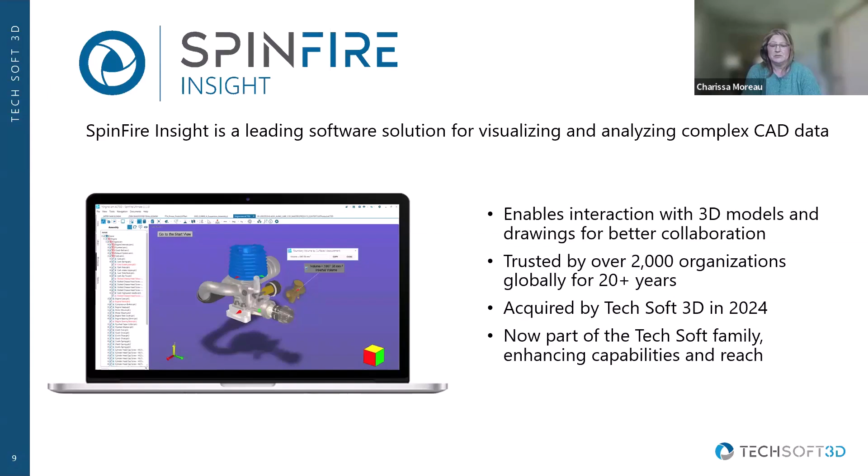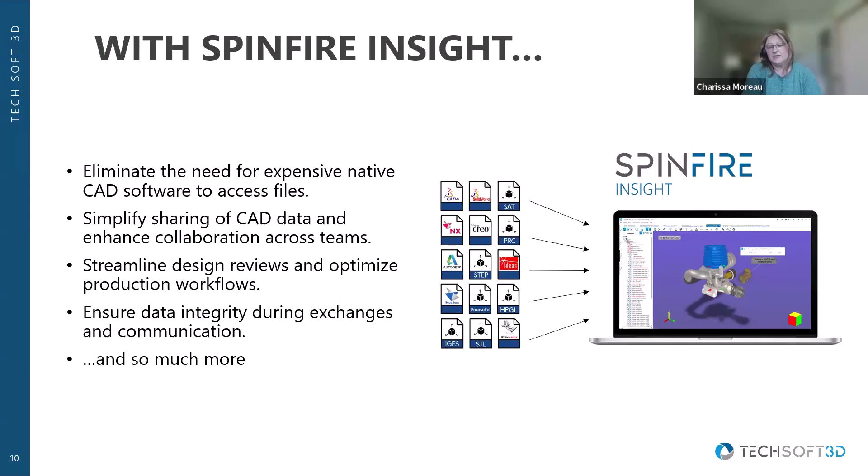With SpinFire Insight, file format compatibility is no longer a barrier. We provide seamless access to all major CAD file formats, simplify collaboration across teams, and streamline workflows, all while driving cost efficiency. This is the most obvious challenge that SpinFire solves. SpinFire Insight can handle multiple CAD formats, giving you the flexibility to investigate and communicate on a range of different CAD formats.

SpinFire Insight has a robust set of CAD visualization, measurement, markup, and analysis features, giving users greater insight to product data. With SpinFire Insight, users can effectively expose engineering metadata and view it in context with a 3D model. That being said, I'd like to now reintroduce Allen Hardy, and he's going to elaborate more on this during the demo of SpinFire Insight. So Allen, go ahead and take it away.

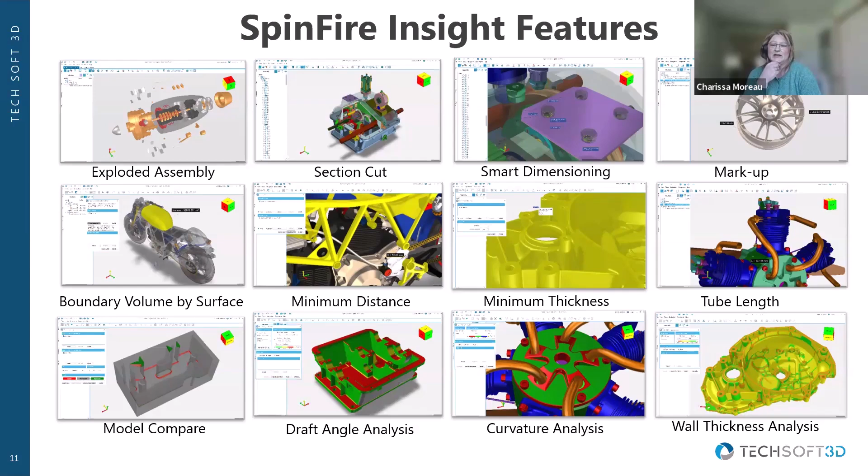Thank you, Charissa. Again, my name is Allen Hardy. I'm a technical consultant here with TechSoft 3D. Today, I'm going to show you some of the major key highlights of SpinFire Insight of the latest release. One of the major improvements that we've made with SpinFire is a massive improvement of 84% reduction in loading time for large assembly CAD files.

Additional features that I'm going to highlight today is the ability to do weight calculations for multi-materials, being able to assign materials to individual components to have a more accurate full assembly weight calculation.

Additionally, we have introduced a new export format, HTML format, which I'll show you how easily that can be done. And some other changes we've made, just regrouping our importer settings and 3D viewer settings, just for a more accurate way of finding your settings.

We have some additional tools that we've recently introduced with SpinFire for advanced selection of group highlighting based on colors and based on attributes, which I'll get into shortly. That just helps engineers be able to quickly find parts for part identification. And then we always have new updates periodically throughout the year for importer updates to stay in line with the new releases of the major CAD formats.

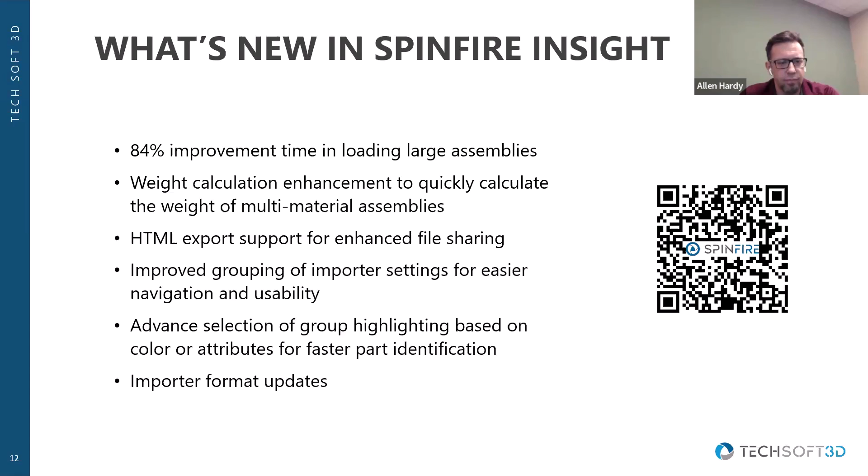And now I'll go ahead and jump into our demo.

One of the major changes we've made with the latest release of SpinFire is a new version scheme. Historically, we've always kept it at 11.5, 11.10, previous release 11.12.0. But now we've changed it so that at the top here you see SpinFire 2025.1. This aligns our versioning scheme with the rest of our TechSoft products, and we've made significant performance improvements as far as loading time goes.

So if I jump over to my homepage, here we can see a list of our recent documents. I'll go ahead and hide this for now. With my recent documents, it actually displays the file location, the timestamp of when it was last modified, size, and the time duration it took to open up that file within SpinFire.

Here we can also right click and explore that file in the file explorer, or the folder on your desktop. I can also open or reopen the files from here as well.

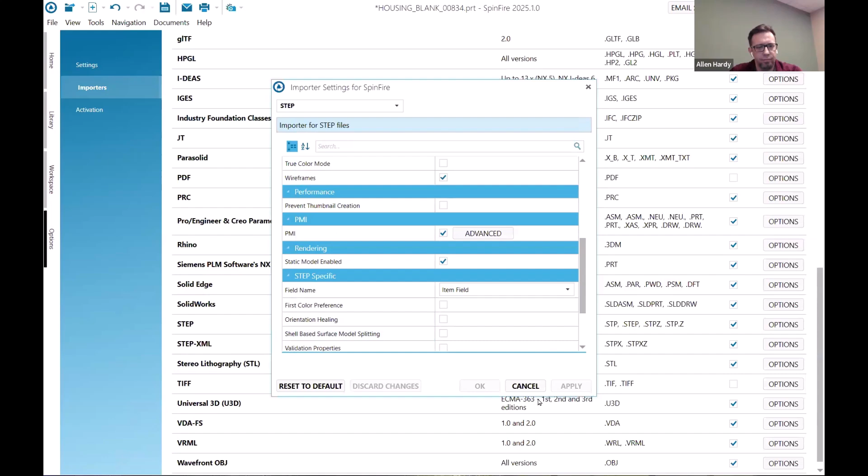Some of the other things that would help with enhancing performance: with your graphics driver, you always want to keep that updated to the latest version. There's also an option if you go to the control panels of the graphics drivers, there's a way to update that setting for SpinFire and SpinFire Viewer to select a high performance mode. That will help to optimize or enhance your usability of using SpinFire.

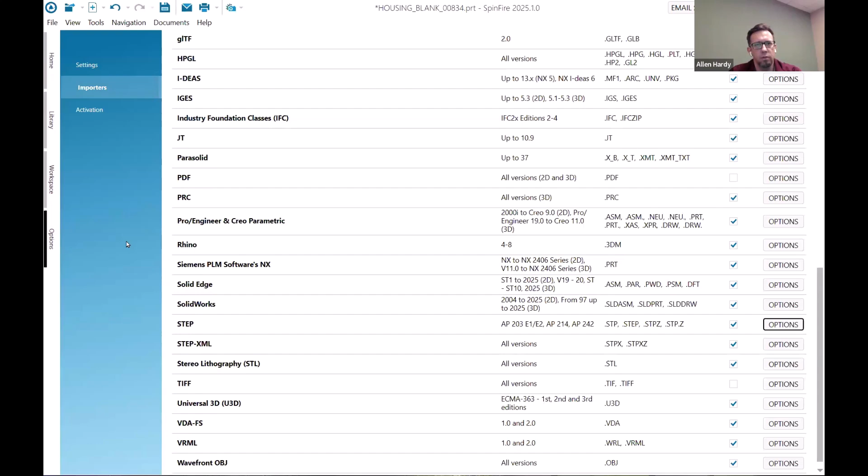Now let's jump into one of these examples here and show you some of the key changes, key highlights that we've made with the latest release. And the first thing I want to mention is the material assignment.

For example, we have a full assembly here. Initially, if you were to do a weight calculation of an assembly, you right click on a part and go to calculate and say weight. By default, this is showing zinc and only showing the single part. If I right click on the parent item and say calculate, it would give me the weight, and it would only be one part. This is a new feature we've introduced in the latest version where it labels all of the materials built into this assembly.

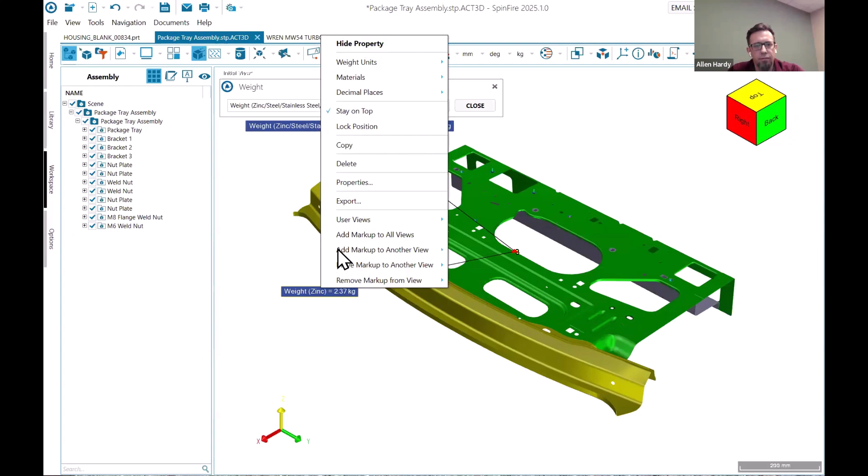In this calculation where I calculated zinc, by default right now, because of my drop-down menu, I have it set to zinc as my default. I can change this to any other material and do another weight calculation, and it will take into effect what I had selected in that default. I can also always go back and change that manually with the existing measurements or calculations we have here.

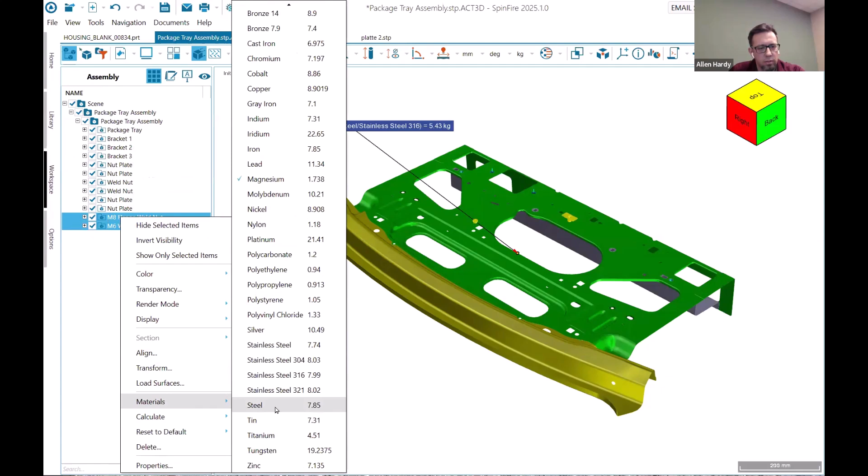So now to get to the point of being able to calculate multi-materials, let's just say we have nuts here assigned steel - I'm sorry, wrong one. Multi-select with holding my control key down and go to material, and let's make that stainless steel. Weld nut, right click, steel. Change these to steel. Maybe change these as well to steel.

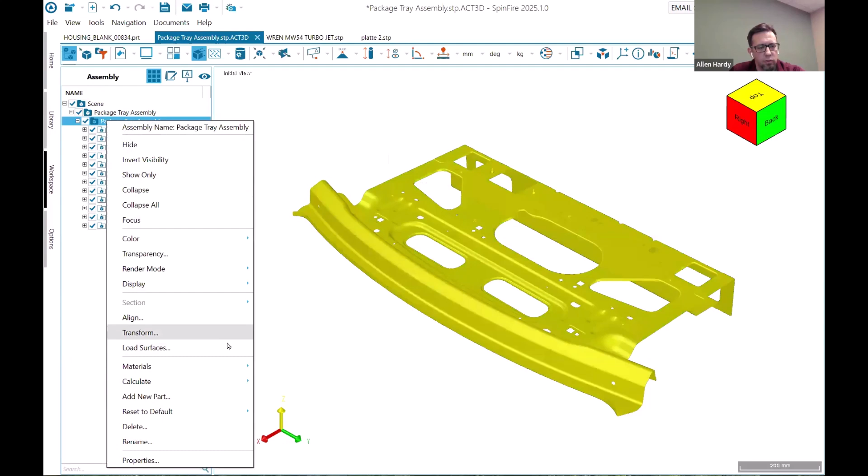All right, now once I've changed my materials for all of those different individual components, let's do a calculate weight once again. And now we see weight has steel, stainless steel, and magnesium assigned to the different materials.

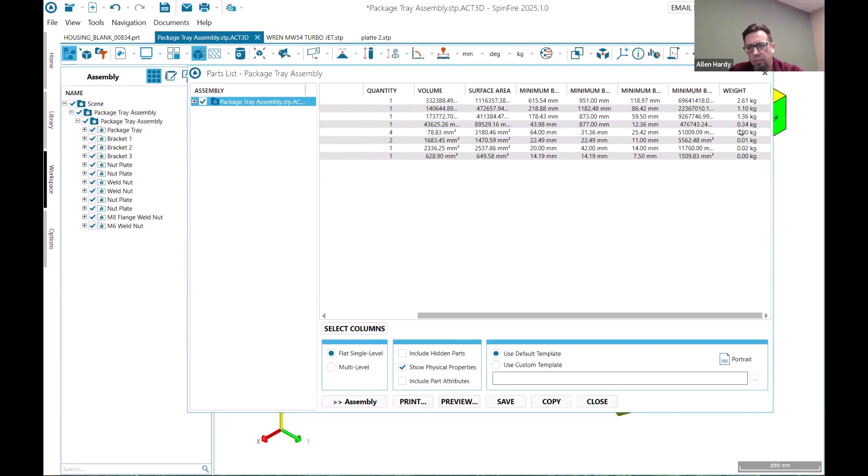Another nice feature we have with being able to assign these materials to the individual components: if I navigate to File, Export, and go to Parts List, I'll select Show Physical Properties. As that loads, it'll add all of the additional columns to be able to export a bill of materials, and it has that weight information in it. The values under my weight calculation for the different individual components are updated based on the selected or assigned materials.

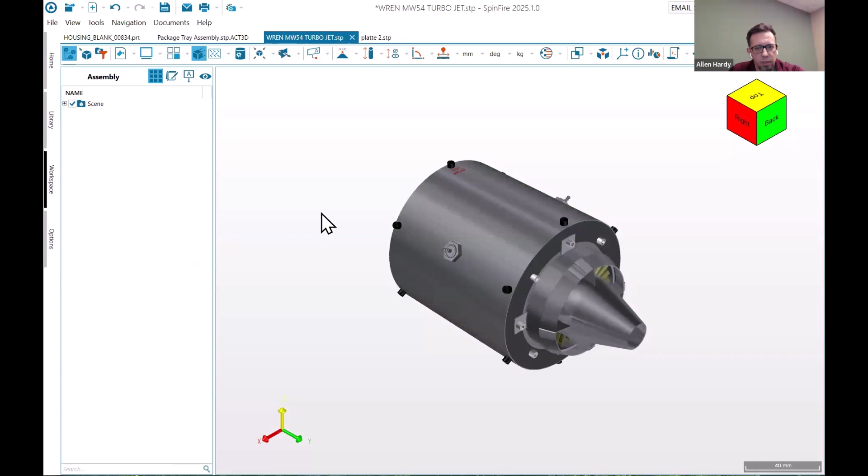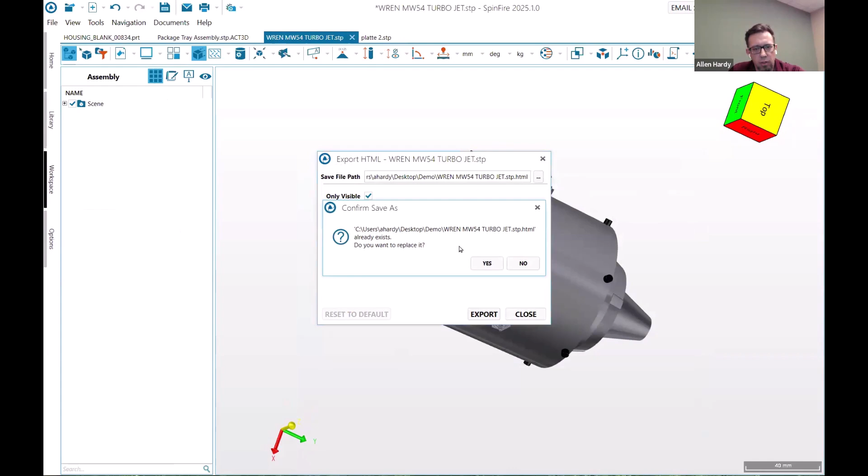Additionally, we have introduced the ability to export as HTML format. So let's go to another example here with this turbo engine. If I go to File, Export, HTML, and we have only visible selected, by default that will save an HTML file to the location of the initial CAD file when I opened it. I can always browse and point to a different output folder if I'd like. So I'll go to Export, replace it, sure. Okay, and then as that file generates, I'll go ahead and open up the HTML file.

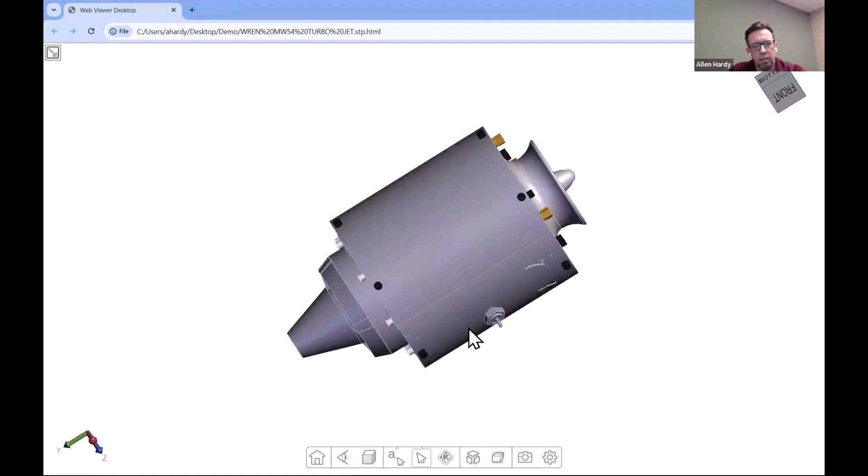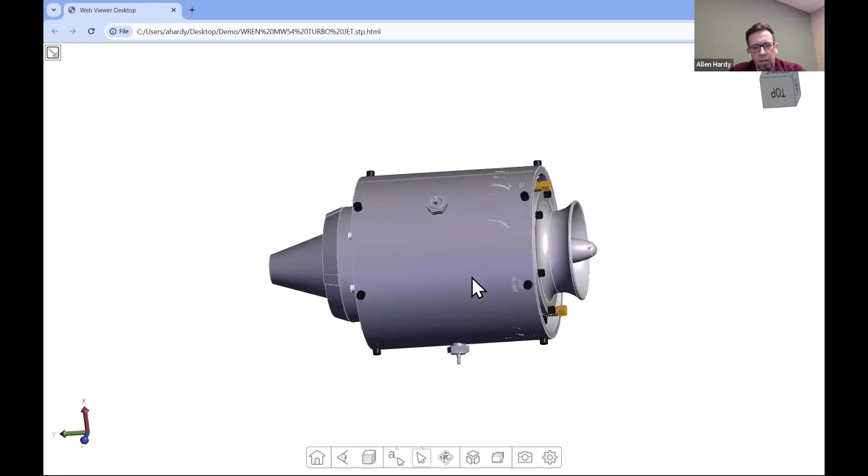This HTML file is automatically loaded into my default web browser. As you can see, without having to install a CAD application or CAD viewer, with the HTML file being able to load in the web browser, I'm able to quickly spin the CAD model around, or use the navigation cube, clicking on the different parts of the cube that will also spin that model around.

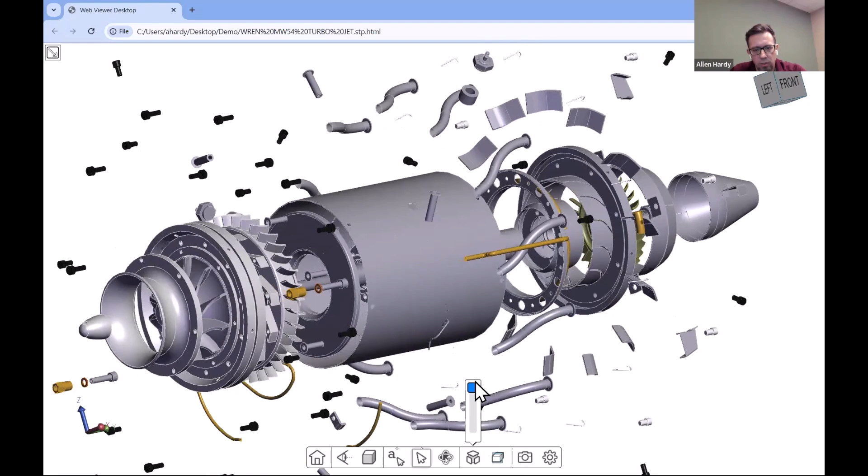A couple of nice things that the web viewer provides is the ability to do an exploded assembly. So if I toggle my exploded icon, you get this little scroller bar here, and scroll up, and you can see those parts explode off of a spherical center point of this entire assembly.

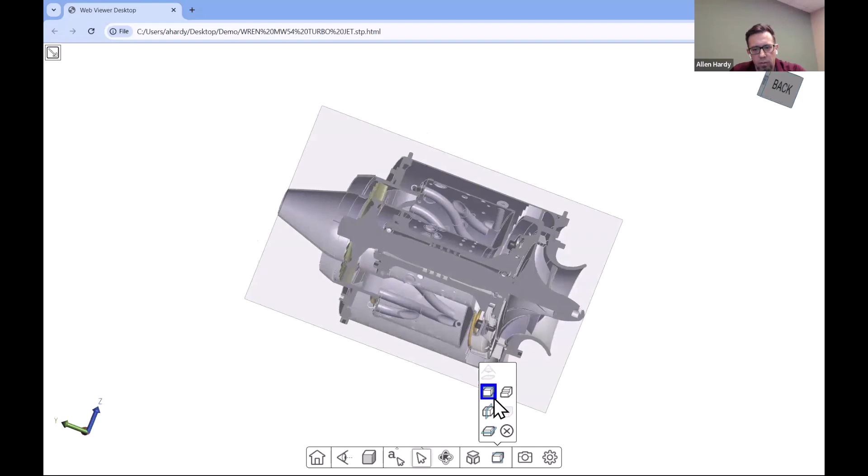Then we have cross-sectioning. There are 3 different planes here that I can toggle on and off. So let's just start with one. With this one section cut open, if I press and hold the plane, my cursor on top of the plane, and move my cursor around, I can see that move around, and we see the section cut this way. Now, if I click on this plane again, it actually flips the plane over, turns it off, turn it on. Second click reverses it or flips it, and third click turns it back off.

As well, if I had 2 planes here, we can do a quarter cut this way. And if I wanted to quickly just reference the rest of the assembly, I could turn that back on, and it actually flips it around.

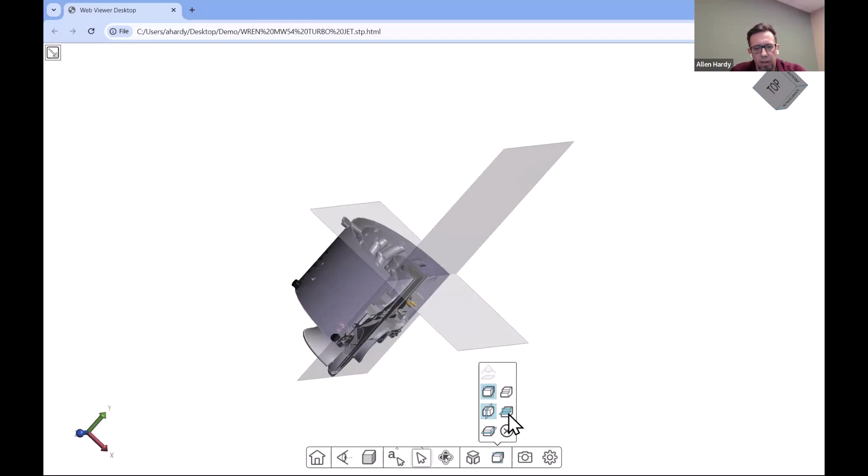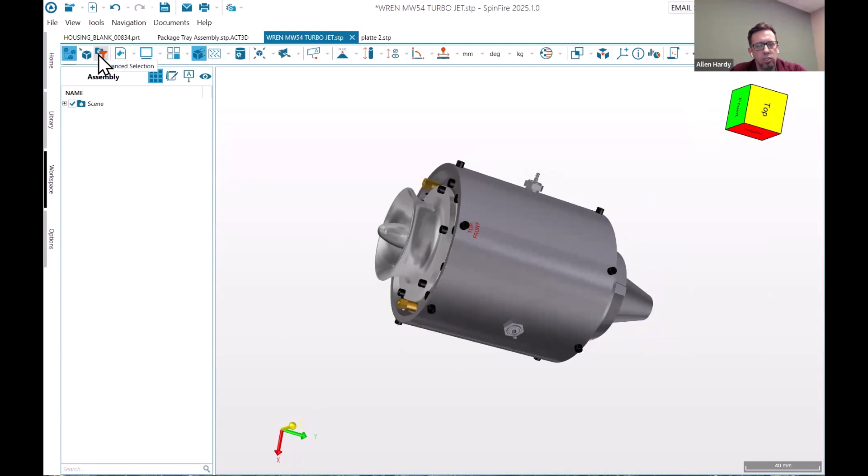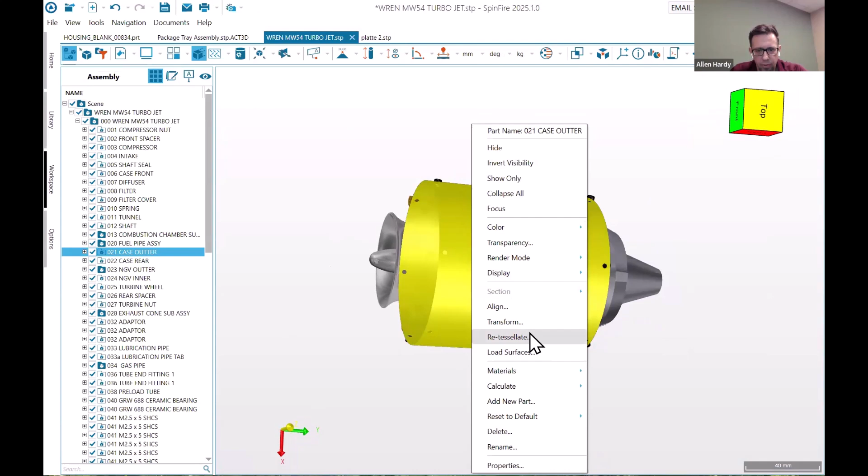Another feature that we've recently introduced with SpinFire Insight is this ability to do an advanced selection, highlighting of parts. Let me just click on this part. Right click, you see a context menu that gives you a handful of features specific to part selection mode, or specific to selecting individual components. That same context menu applies if I were to right click on the component within the model tree.

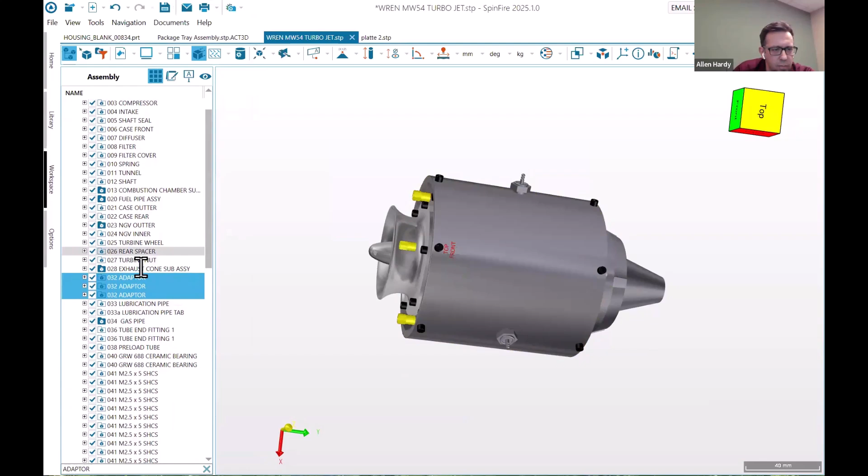Now, if I go down here and type in adapter, this then highlights all of the components that have adapter as part of the part name within that assembly tree. You also see that highlighted in the geometry as well.

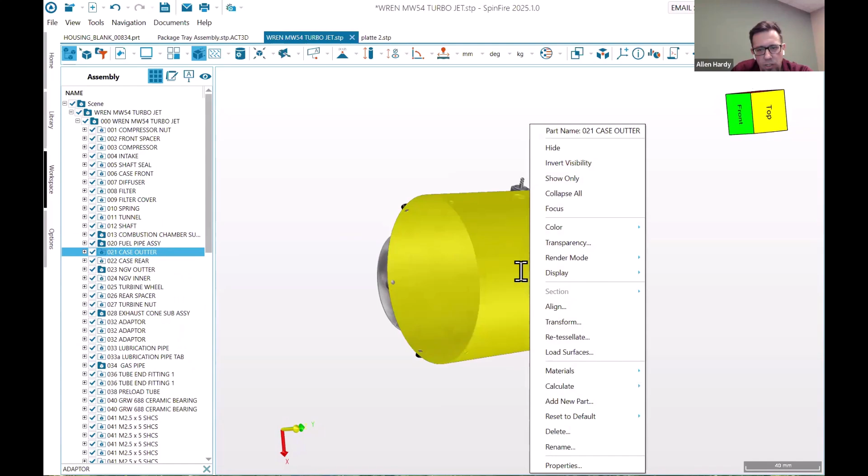Right clicking on a part will select it in the tree and the geometry. So you can do certain things, like maybe I want to change transparency of this housing just to be able to see the inside components, make that more visible.

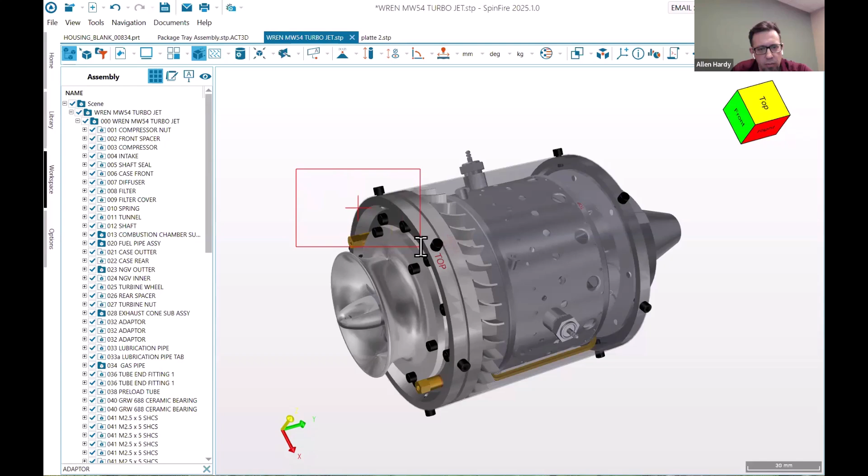Also with multi-selecting, if I were to hold my shift key down and right click, drag and drop, it creates this red box, and that's going to highlight all of the components that touch that box. Additionally, if I use my shift key in the assembly tray, that's also able to multi-select, or my control key, again, that multi-selects as well.

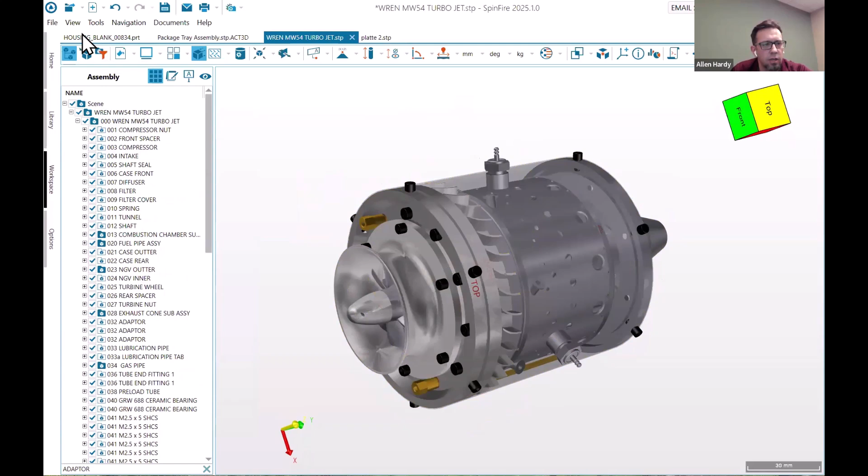What I wanted to get to you is the additional feature called advanced selection. This feature allows me to select parts based on color, so all of the components that have the same color assignment, or you might have a case where you have a single part.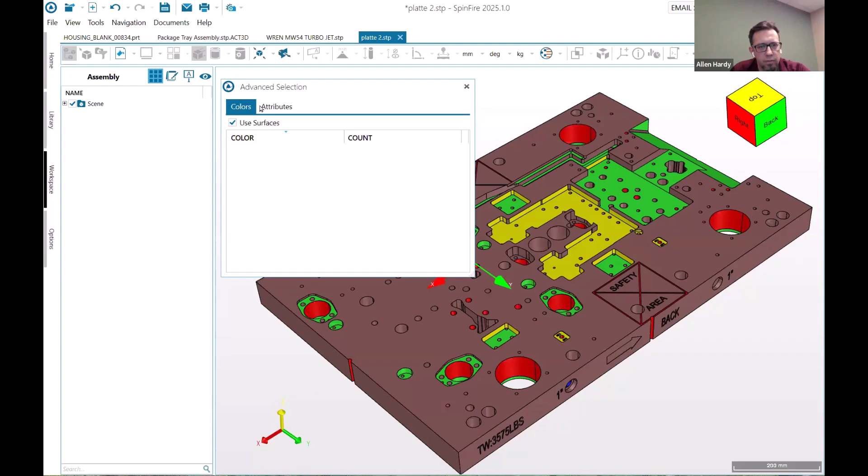Advanced selection. Here's one part and you only see one component there. Let's just change this to use surfaces. It's supposed to have multiple surfaces there to show up.

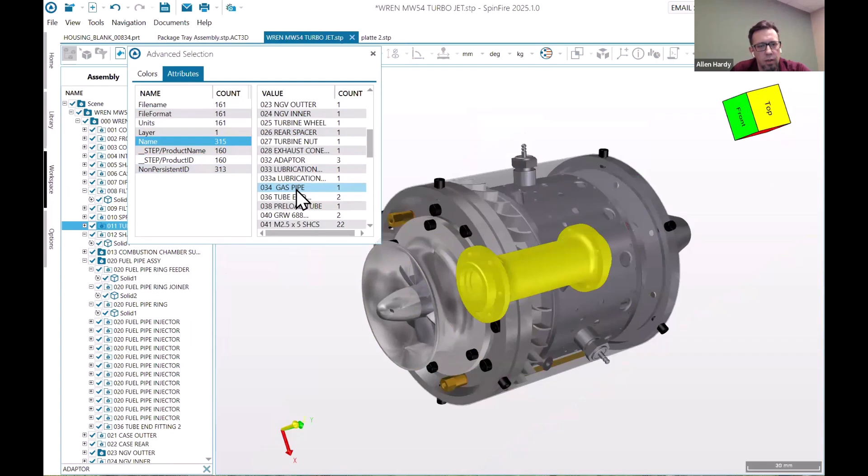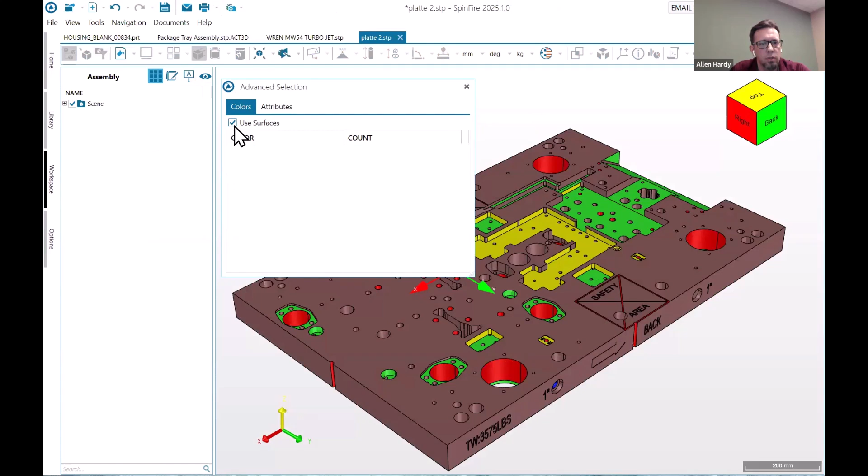Let me just go ahead and switch over to another browser here. Let's see our selection mode. Okay, that's interesting. It should be highlighting the different color components there.

Additionally, with the individual colors, or being able to select parts or surfaces, if I right click, it selects the entire component. We also have the ability to toggle between part selection mode and surface selection mode. Now this, if I were to right click...

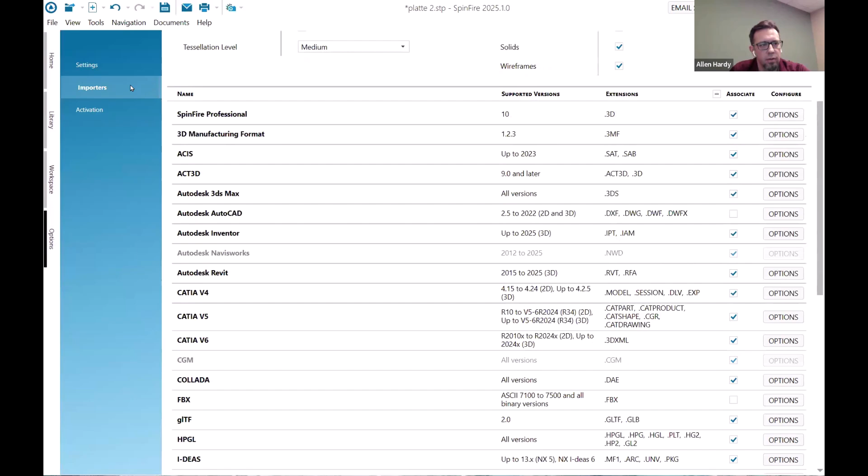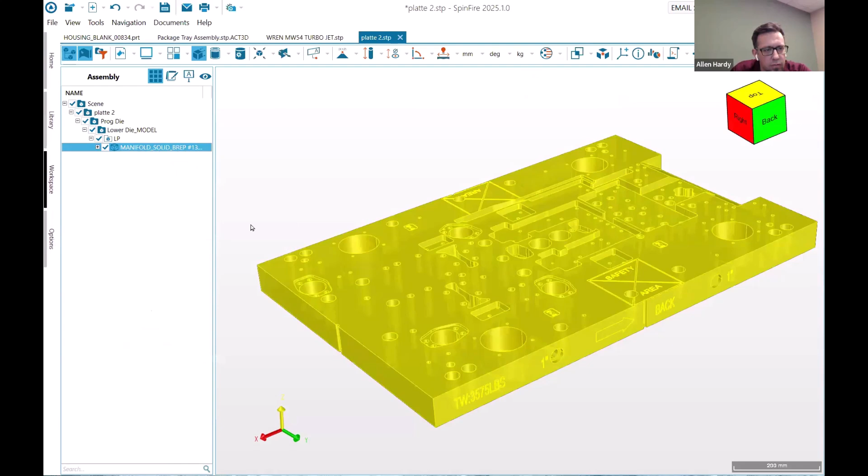I see. So with my performance optimization, I had this load surface under my settings, importers, load surface on demand. So you see how this item in the tree has a circle around that plus. Just to enhance the performance of this model, it wasn't fully loaded. So I will right click on that part and select load surfaces. Now if I right click on a part, it just highlights the individual surface.

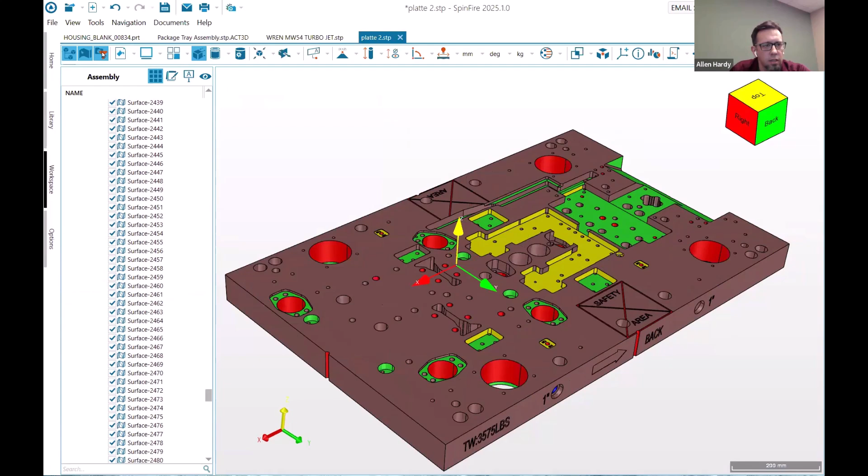Now let's go ahead and check the surface selection mode. Let's toggle between the two. So here we go, that's why I wasn't able to see all the different surfaces, because I had my load surfaces on demand enabled. So it wasn't able to see that information.

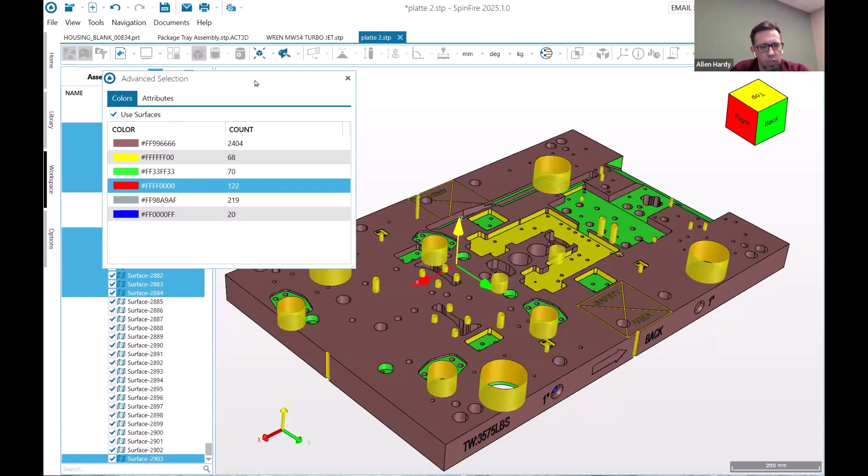But you see now, being able to highlight the specific colors, such as this, all the red components, and maybe you want to change all of those red colors to a different color. So I'll right click on a component in the tree, go to color, navigate to front and back, and just change that color. It takes just a couple seconds to load, updates all the individual pieces.

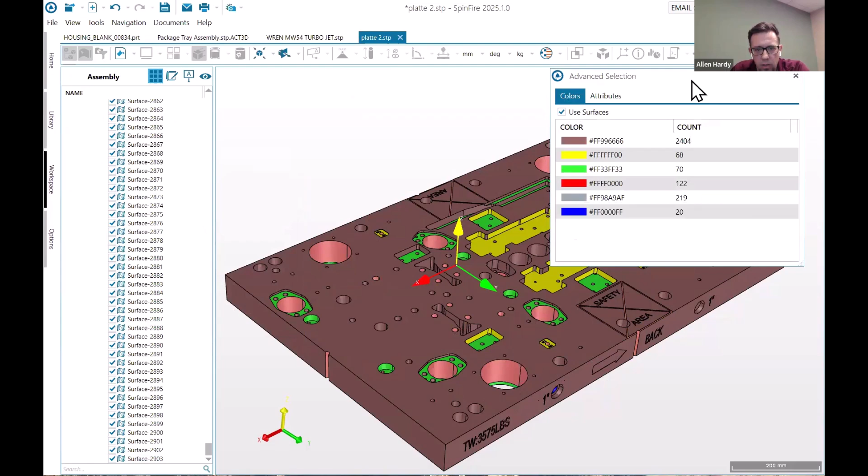And you now see that all those red components are pink. So if I turn this off and back on, you now see that that's also pink as well.

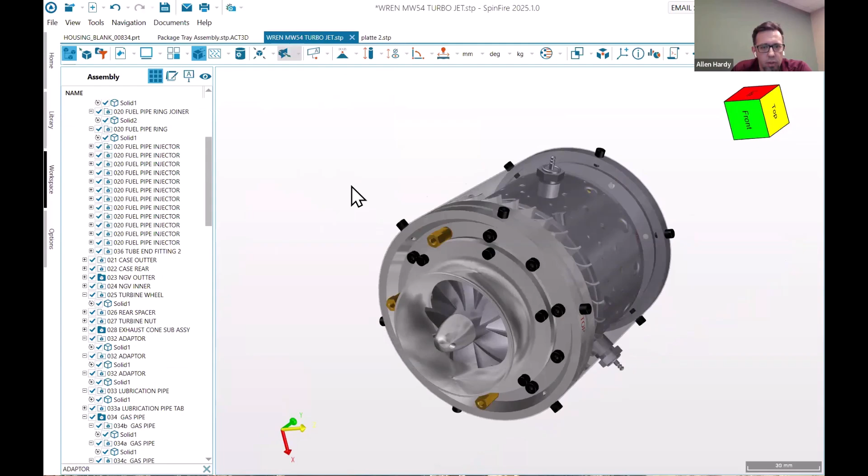Some additional tools I'd like to highlight. This is a common question we get feedback on from customers, to do with cross sectioning and maybe being able to do a projection mode calculation. As I mentioned earlier, right click on a part, you get a few tools here related to the specific part selection.

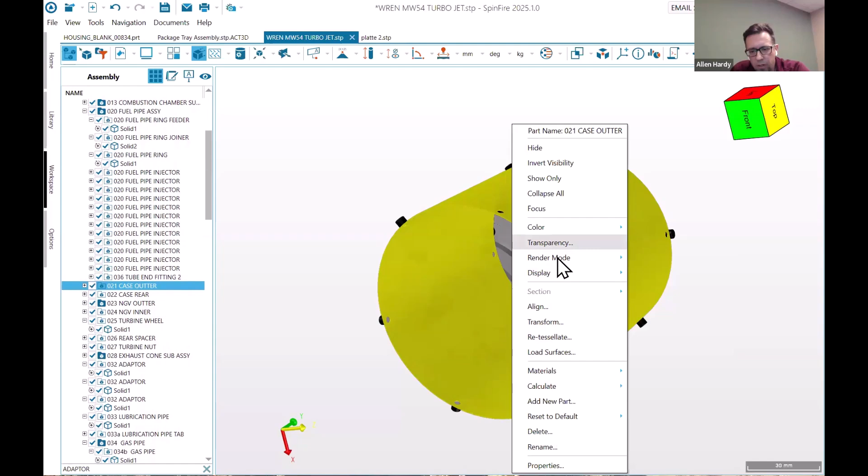Being able to align parts, change the colors, transparency of parts. We can even go in here and rename the individual parts. So you can do all those with the right clicking on the individual parts.

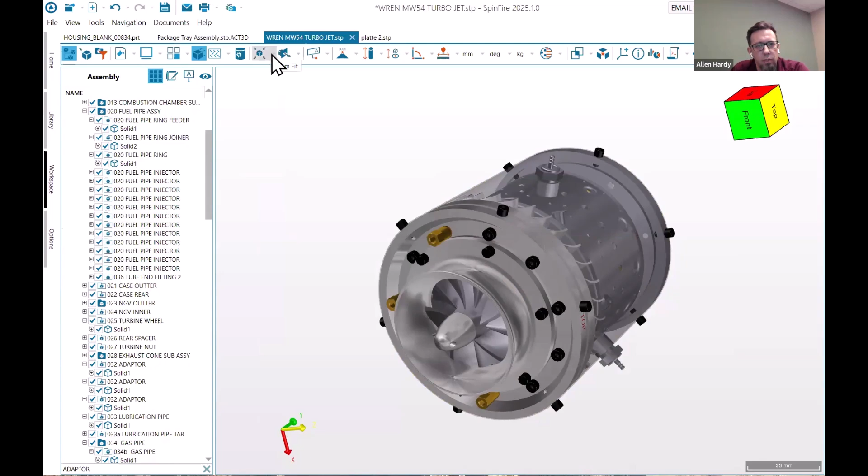Now, if I were to right click in the 3D area, I'll get a different set of tools for navigation purposes, which can also be found in my 3D toolbar. Now if I wanted to do a projection mode, we have a cross-sectioning tool.

If I enable this, that'll toggle the cross-section tool on. And if I go to the pull-down menu, you see you have your other common planes, if you want to do 1, 2, or 3 planes.

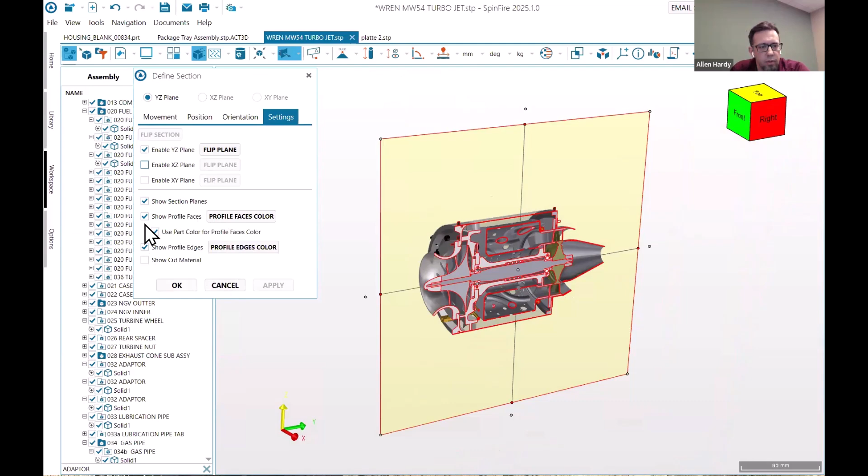A define dialog, which also opens up the dialog window. It gives you the ability to flip the plane, turn on and off multiple planes, change the color of the different planes, maybe show the section plane, hide it.

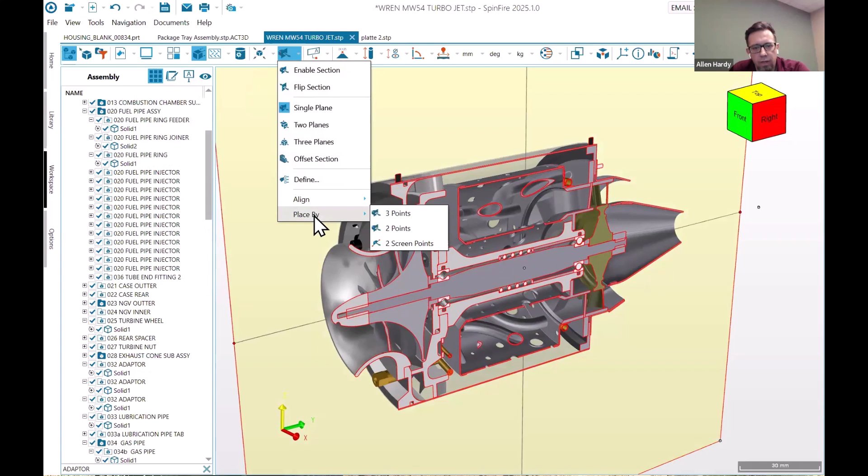Maybe if I want to take a screenshot, a nice clean screenshot without that section plane in the way, I could do that. There's additional features, being able to align the section plane on specific angles or against a specific face. So you can do all of that here.

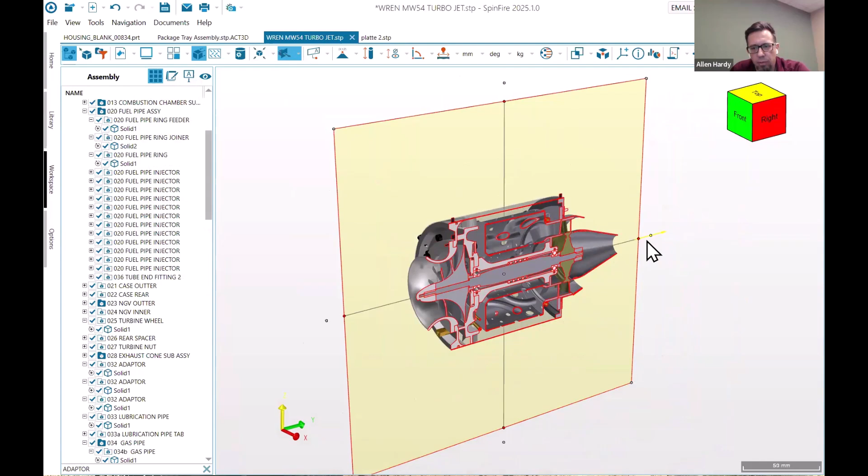If I hover over the different sides, you can see a yellow arrow appear as I hover over the little dots. This allows me to move the plane around. If I go into the middle, I have this ability to slide it over. Now with this over to the side, I'll right click on that plane.

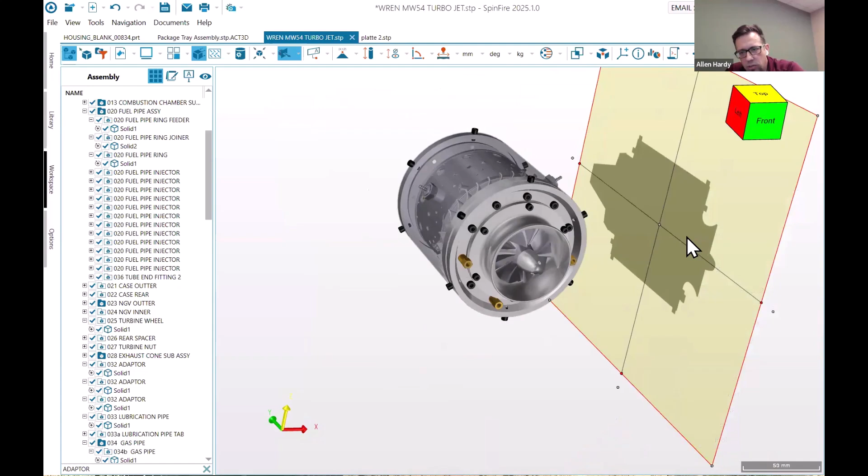You'll see another set of tools you can use with the section cut feature. I'll go ahead and enable the projection mode, and now you see a shadow of that assembly onto that plane. I'll right click and click calculate, then I can say calculate area, calculate projection area. Okay, so now we have our projection area here.

I showed you earlier being able to modify the callouts with the material. You can do that as well with the units. So maybe I want to change that to inches instead of millimeters.

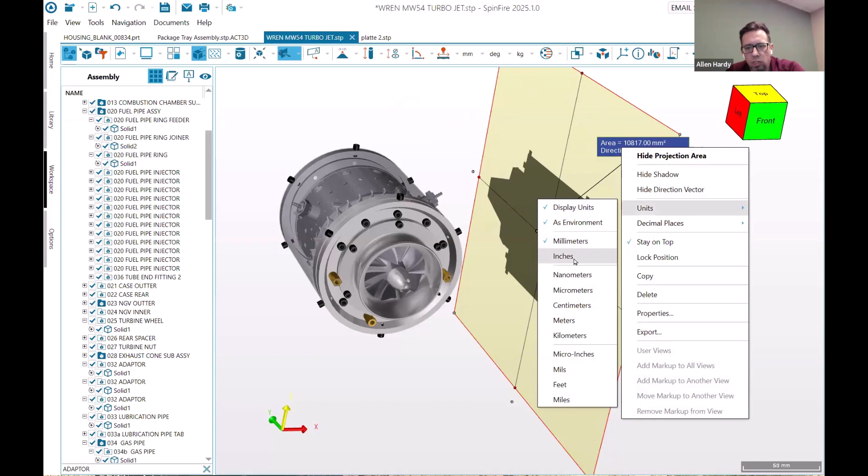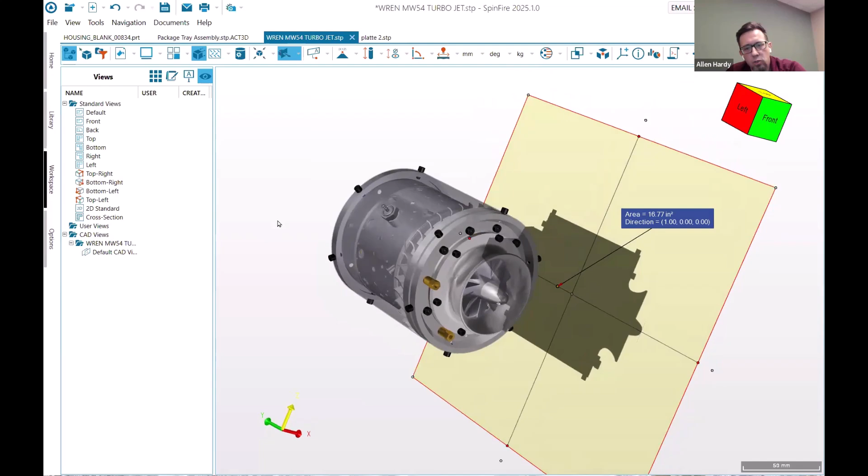Another nice feature we have with our SpinFire Insight, and a common practice I always recommend, is to create user views as you're working with your project file. If I navigate to this eyeball icon, this opens up the views panel. We see a set of standard views that come with the CAD environment. You might have a set of CAD views. Anything listed under CAD views will be all of those views that were defined in the native CAD application that gets retained when I import this CAD model into SpinFire.

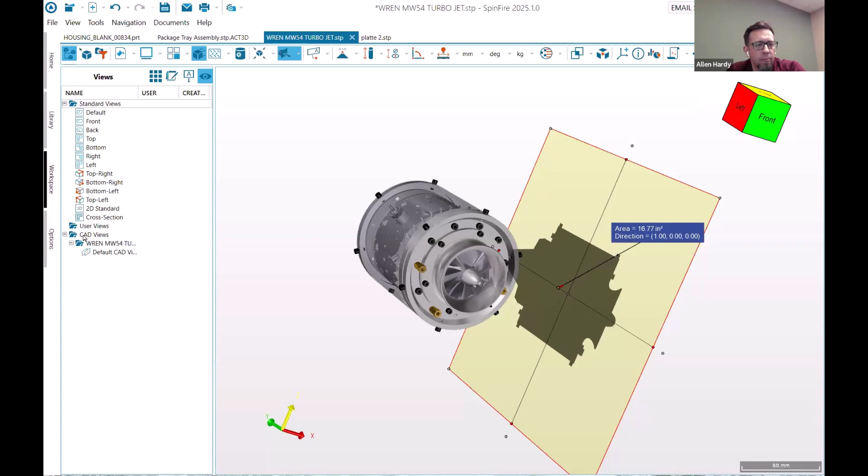Now user views. If I were to right click here and say new user view, I'll just do the projection calculation. And I can maybe make this my startup view.

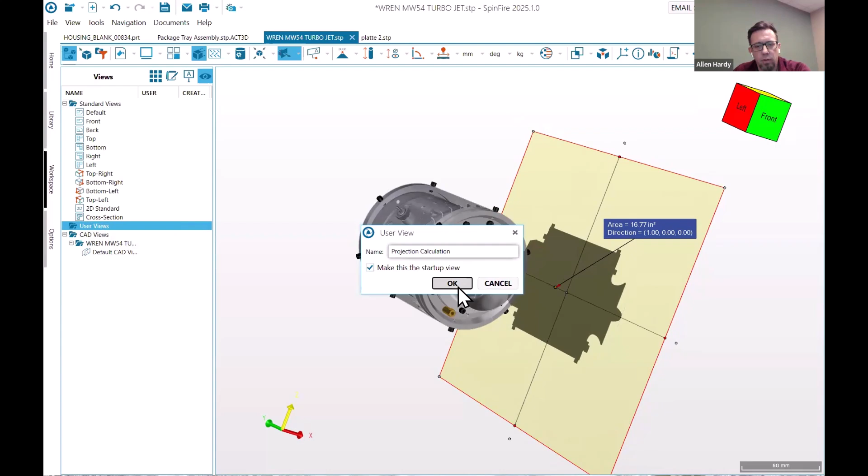Now that startup view, if I were to go to File, Save As, this is going to save it as an Act3D file. Act3D file format is native to the SpinFire Insight application.

If I now navigate to the different individual views here, we'll go ahead and turn off my markup. So we have 4 different tabs up here at the top. Here you see your assembly tree, defined exactly how it was in the native CAD application. I showed you the views panel.

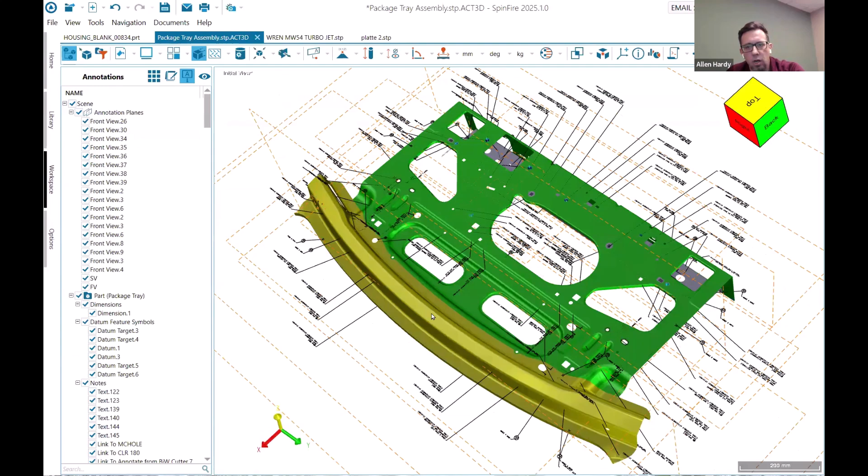We also have an annotations panel. So here, this package tray, if I go and show you the annotations, these are all the annotations, GD&T, FT&A, defined in the native CAD application. And again, if I go to my views panel, you can see all the different views that were defined in that native CAD application that was retained when I imported this package tray into SpinFire Insight.

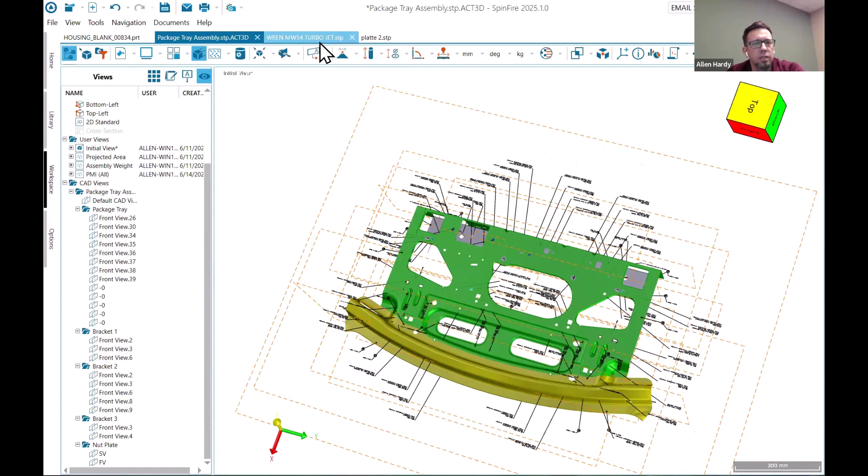Now under the markups tab, any type of measurements, 2D, 3D notes that I might add, or coordinate systems that I may want to add, or aligning parts, all that information gets added and stored under the markups tab. I'll go ahead and check this off to hide that information.

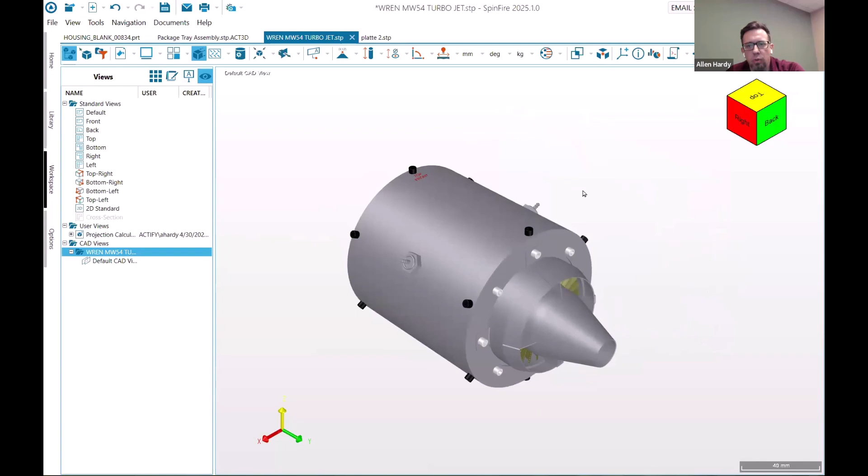Another nice feature we have is I showed you with the HTML format, the exploded assembly. This also has an exploded assembly option. But here we have a few more controls of how that assembly can be exploded, based on linear, radial, spherical, whether I do all parts or only a handful of selected components.

Now, if I were to right click, you see that it spreads out based on the global coordinate system, which is defined here. You might not see that right now, but if I toggle on my coordinate systems, you can see where that coordinate system is currently at. Let's go ahead and toggle this.

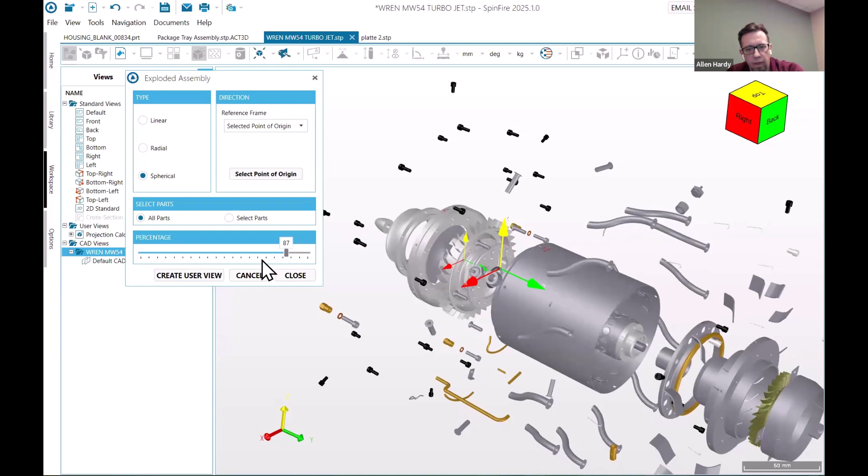Now, maybe I want to change my point of origin. So I'll click on point of origin there and just click on another area of the model. And now you see that it explodes off of that new point of origin.

Another additional tool we have is a set of measurements. You have your basic measurements that you can do, point to point, arc center to arc center. You have your minimum distance type measurements. There's a drop-down menu with focus on arc, linear, and a smart edge measurement.

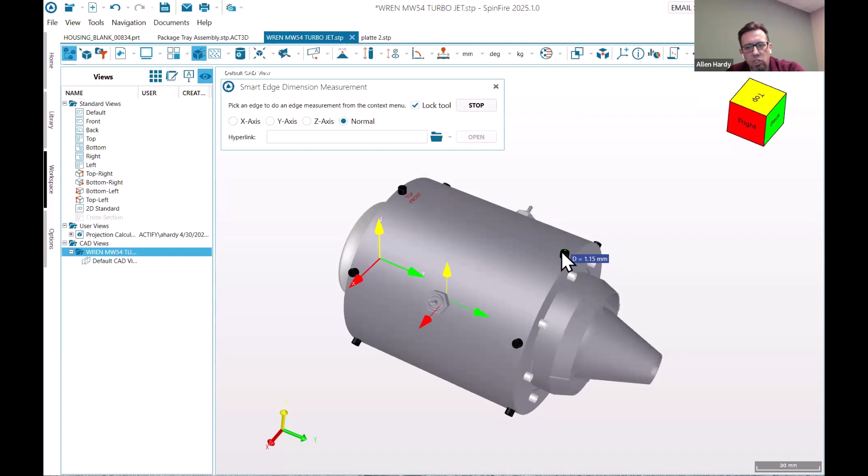If I were to use this measurement and hover over my assembly, it will actually adjust the type of measurement based on what I'm hovering over. So if I hover over an edge, it might give me an edge measurement. If I hover over a circle, it'll give me a diameter.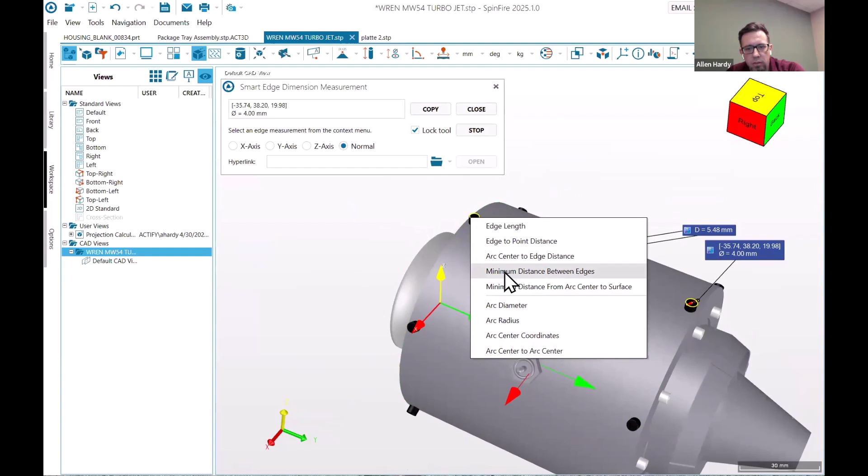Now, if I want to go from circle to circle, maybe from one point to another, I'll first right click, and this gives me the option to do minimum distance between edges, or arc center to edge distance. Let's just do that, for example.

Now we have 87.55 millimeters, and I can change this. That's direct point to point. Now I can change it to X, Y, Z. I can say all, and that will give me the distance for all of them, for example.

Again, I want to thank everybody for your time to allow me to show you some of the key highlights of the latest released version of SpinFire Insight. And now I'll go ahead and pass it back on to Charissa.

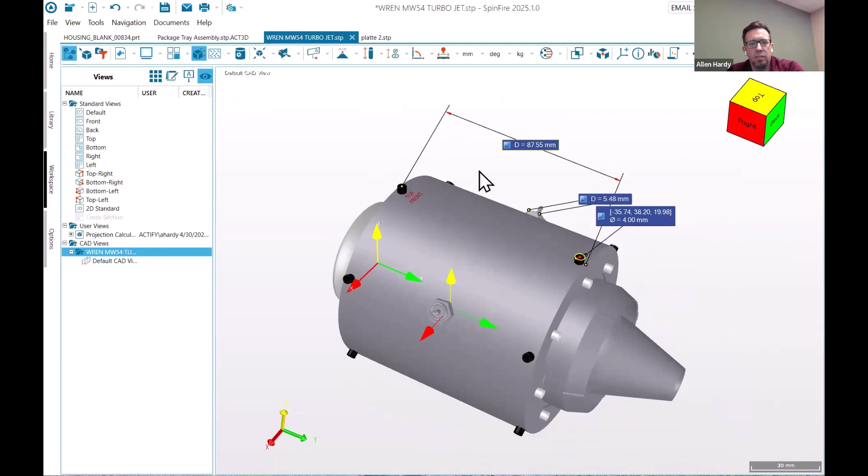I'd like to take a moment now to talk about why enterprise visualization matters and how SpinFire Insight can make a real difference in your organization.

On average, only 4% of your staff are CAD designers or power users that define the product definition within the native CAD applications. So what about the rest of the organization? In building products, you must share and collaborate regarding this information, otherwise errors, delays, and costs are inevitable.

CAD is too complex and expensive for enterprise use. All other viewers are sold per license or by named user, automatically limiting who gains access. As a result, employees without access often buy alternative viewers to complete niche tasks, resulting in scattered, incompatible viewers across the enterprise. It's been this way for decades.

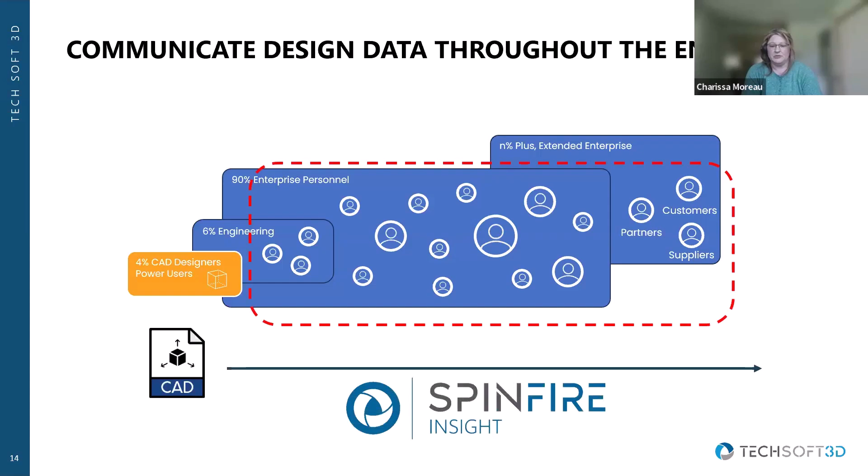Today, there is a better way, and only one vendor that has solved this strategic problem. That vendor is TechSoft 3D, and that tool is SpinFire Insight.

Who benefits from the CAD viewing and CAD access? Pretty much everyone within the value chain of discrete manufacturing organizations, the other 90%. You have IT, engineering, quality, company management, suppliers, customers, etc. There are a lot of benefits to consider, especially with regards to providing enterprise CAD viewing.

What does that mean from a practical standpoint? Here's an actual customer, and after evaluating many other solutions, SpinFire Insight was chosen for its ease of use, yet with all of the power the users required. What made the difference was our SpinFire Insight Enterprise Bundle.

Unlike vendors that restrict user tracking, impose complex protection schemes, and create barriers to scaling, SpinFire Insight's Enterprise Bundle makes enterprise-wide deployment simple. Its cost-effective model and minimal administrative overhead allow adoption to happen organically without the friction of red tape. By eliminating the direct expense of overbought CAD licenses, this customer paid for the SpinFire Insight solution, still saved $250,000 annually, and expanded the solution to 64 separate locations.

Moreover, cost reduction wasn't the primary driver. Relying on multiple CAD viewers introduced avoidable errors that ended up costing far more than the savings gained from eliminating the CAD licenses. After all, that's why you do this. It's not only to save money, but it's also to improve business performance. Having the team on the same page in the end is priceless.

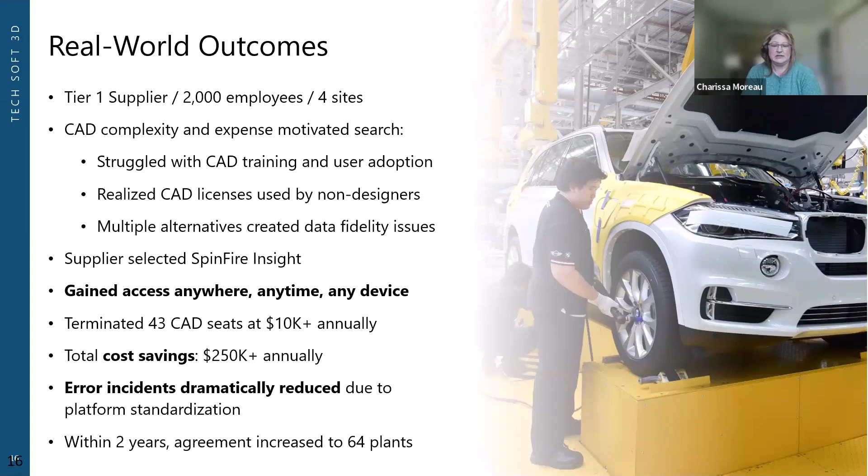I think you're muted, Charissa. There we go. Is that better? Yes. Thanks so much, Charissa. Thank you, Allen. Thank you for your presentations.